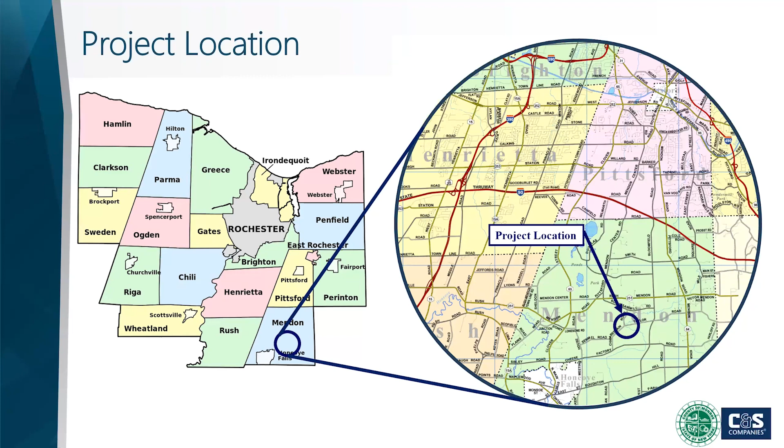The existing bridge was originally constructed in 1950. The main supporting members are steel beams that support a timber deck, and the abutments are also a timber design using timber piles and timber lagging. The bridge has a 27-foot long span and is 26 feet 6 inches wide. Traffic counts from 2019 show 439 vehicles per day cross the bridge.

Based on the existing conditions, this bridge was added to the capital improvement plan for the county for construction in 2025.

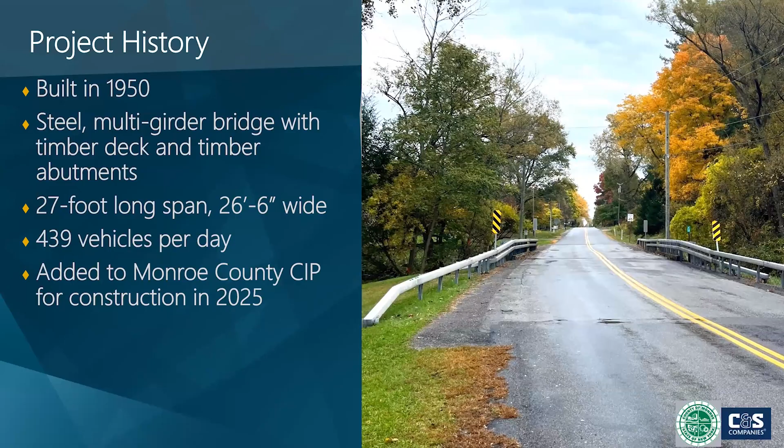Now I'd like to get into a summary of the existing conditions and the concerns at the structure. The first relates to hydraulics. Irondequoit Creek is a major water body in the area and is prone to flood events.

On the left side of the screen is the FEMA flood map of the area, and you can see that there is a wide floodplain both to the south and to the north of the bridge. This means that the bridge serves as a constriction in the floodplain. When this happens, the velocity of the creek is sped up, which results in erosion of the stream banks, like you see in the photo on the right side of the screen. This is on the southwest stream bank.

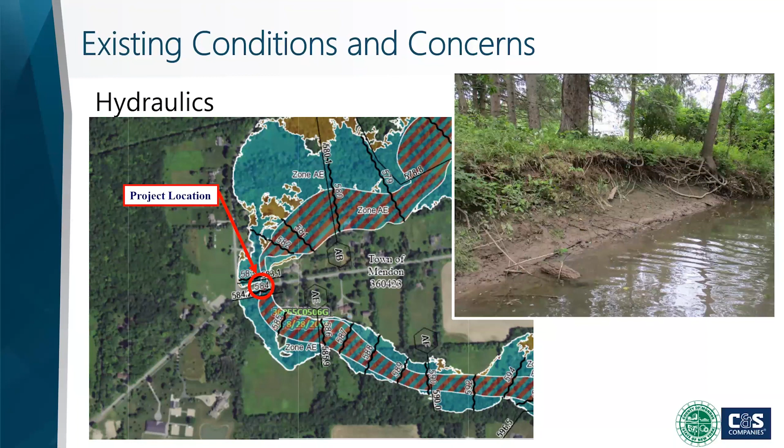Another aspect of the bridge that needs improvement is its width. As mentioned, the total clear width between the bridge railing is 26 feet 6 inches. This is narrower than the current standard lane and shoulder widths that Monroe County likes to have on all of their roads. This project will aim at making the bridge and adjacent approach roadway wider to meet these standards.

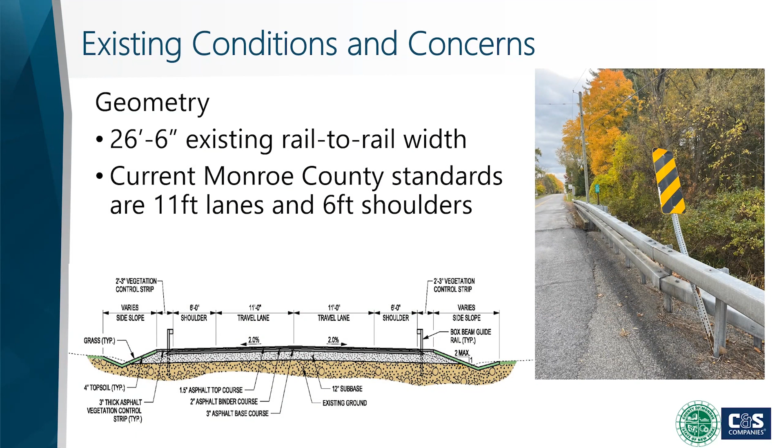There are a number of conditions on the bridge that need to be addressed under this project. These include deterioration of the timber deck, isolated areas of the steel beams that are showing some loss of strength. The timber abutments are showing their age, and portions of the wing walls have partially collapsed.

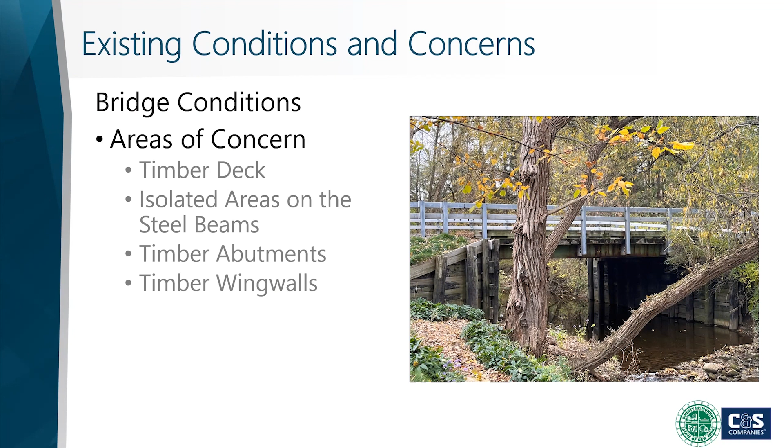The area of the timber deck near the fascia girders shows numerous areas of split and degraded wood, with small places where chunks of wood are missing. The wood is soft and rotting in spots as well.

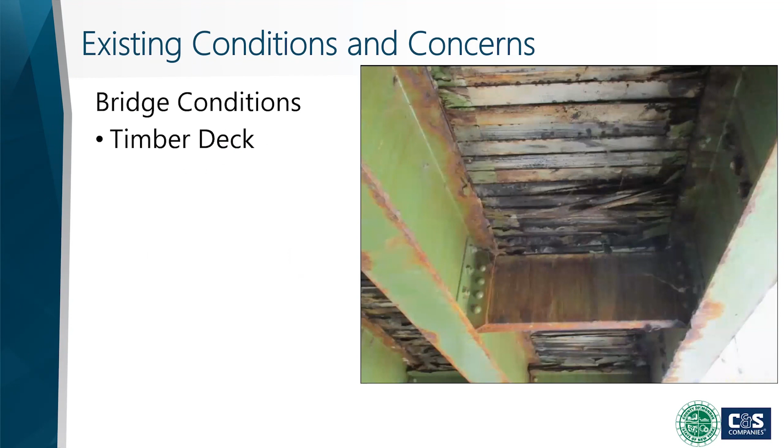This is a picture of the deck in 2020 when a hole had formed. Monroe County quickly fixed this issue, but it shows the need for a more permanent solution to the bridge deck.

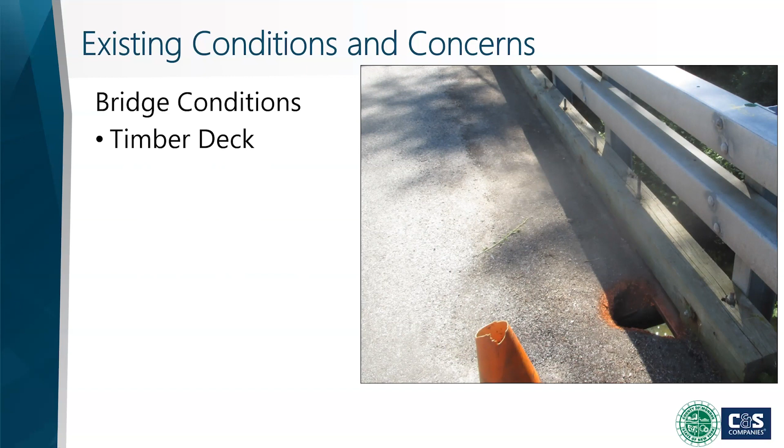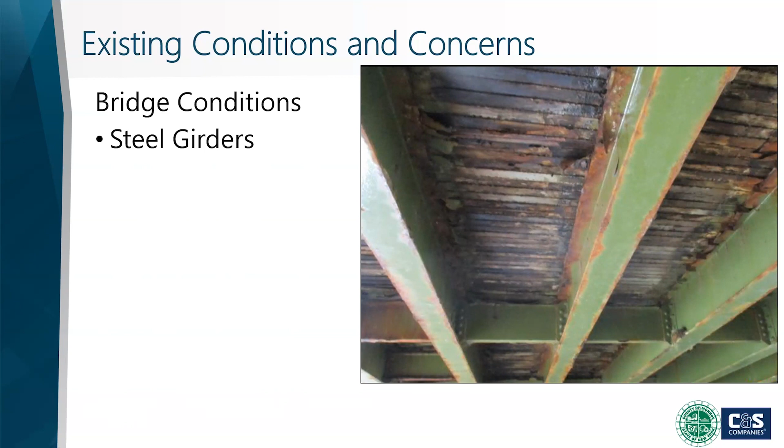For the steel beams, most of them are in good condition, but there are a few isolated areas where rusting has spread and is starting to make an impact. The worst location is on the northernmost beam, where rusting has caused some loss of section and a slight reduction in carrying capacity. It's nothing to be concerned about from a safety standpoint, but needs to be addressed.

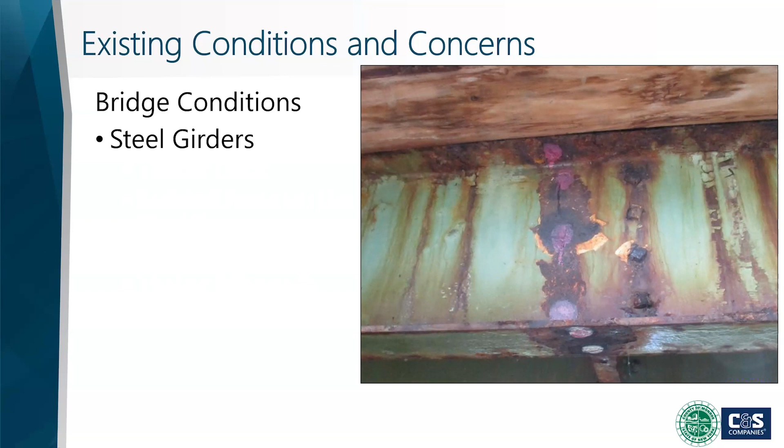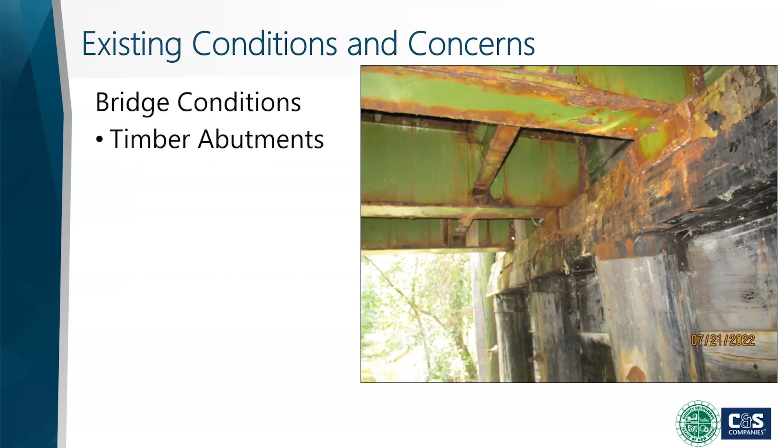The timber abutments are a combination of timber piles supporting a timber cap beam that ultimately supports the steel beams. There is timber lagging behind the piles that retains the roadway embankment. The piles and cap beam are slightly out of alignment, and there are small gaps in the lagging caused by movement of the various timber members. The cap beam itself is also deteriorated from exposure to the elements over the last 73 years.

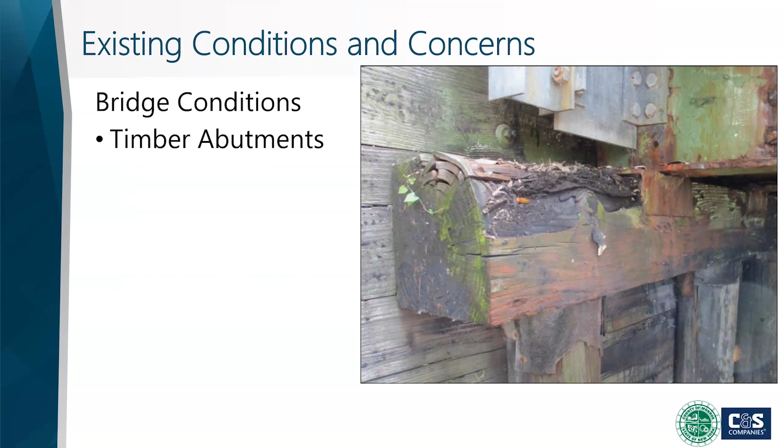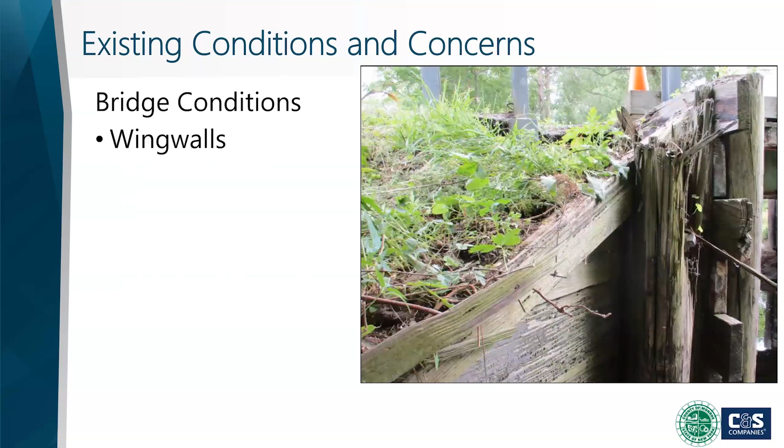The wing walls are in poor condition with some loss of embankment from behind the walls, and there are some missing boards. There are a number of rotting, splintering, and displaced timber elements throughout each of the wing walls.

Given the condition of the bridge, the hydraulic issues, and the geometry limitation, Monroe County has advanced this project with the intention of replacing the existing bridge in its entirety.

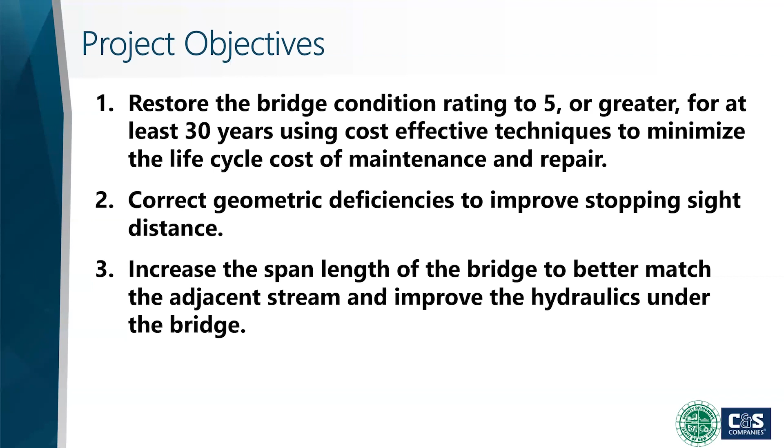Specific objectives for this project are as shown on this slide: restore the bridge condition rating to 5 or greater for at least 30 years using cost-effective techniques to minimize the life cycle cost of maintenance and repair, correct geometric deficiencies to improve stopping sight distance, and increase the span length of the bridge to better match the adjacent stream and improve the hydraulics under the bridge.

To achieve these objectives, a preferred alternative has been developed. The preferred alternative will completely remove the existing bridge and replace it with a new bridge. The new bridge will be a 3-sided precast concrete rigid frame and will look very similar to the bridge shown on the right.

The bridge will be 37 feet long, which is a significant increase from the existing 27-foot long bridge, and the opening will be 10 feet high. This will increase the hydraulic capacity and improve hydraulic conditions through the area.

150 feet of road reconstruction will be needed to allow for the bridge construction, and this section will be widened to allow for 11-foot lanes and 6-foot shoulders, which matches the Monroe County standard widths. Stone fill bank protection will be added to protect the new structure from erosion and scour.

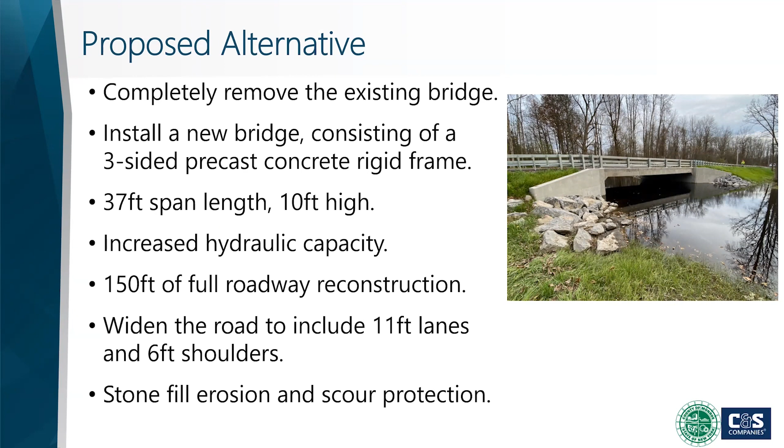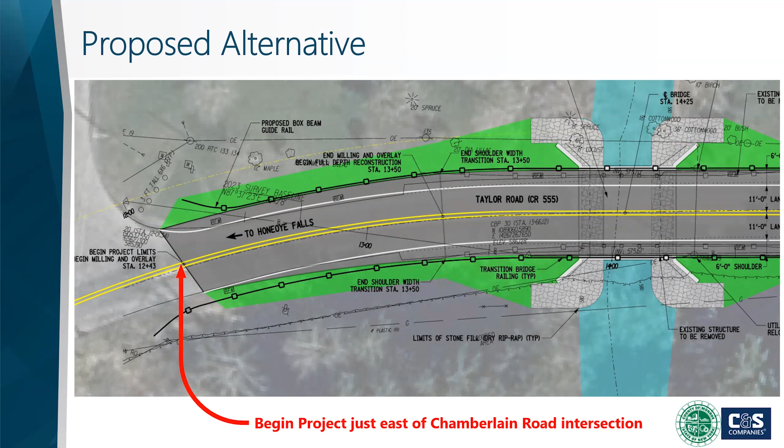Here is a graphical representation of what the entire project will entail. Some of the specific aspects of construction are as follows. The project will begin just east of the Chamberlain Road intersection. It is at this point where our project will tie in with the existing pavement.

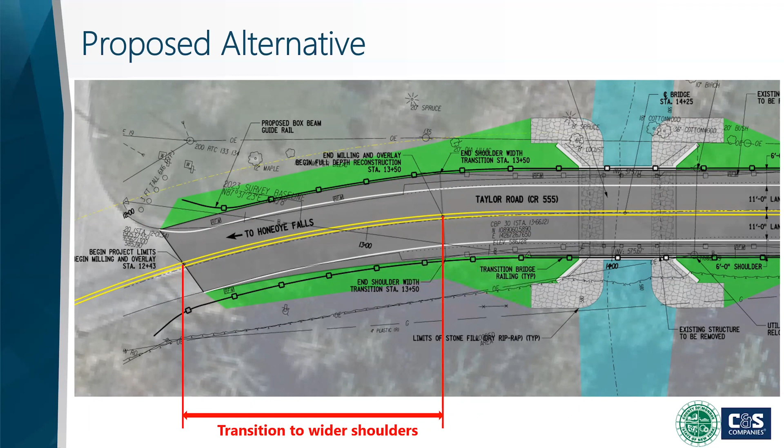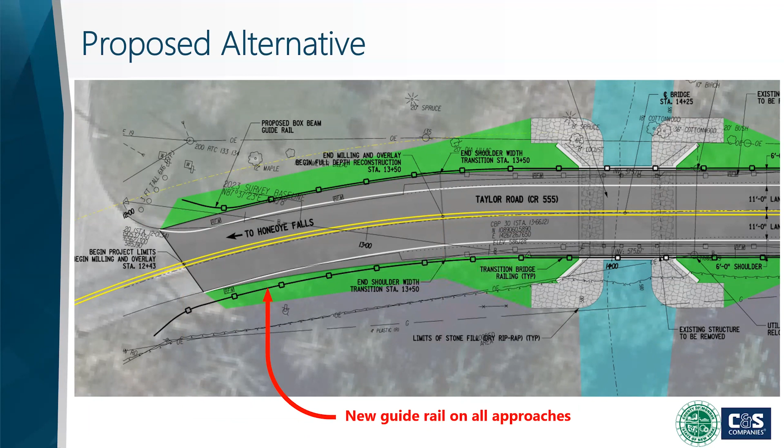The first 100 feet or so will be a transition from the existing pavement width to the widened portion that will be extending over the bridge. This requires a pavement resurfacing within the roadway and reconstruction of the shoulders. This area will also have guide rail added to it, which will be the case in all 4 corners of the bridge. The railing will be upgraded to meet current safety standards.

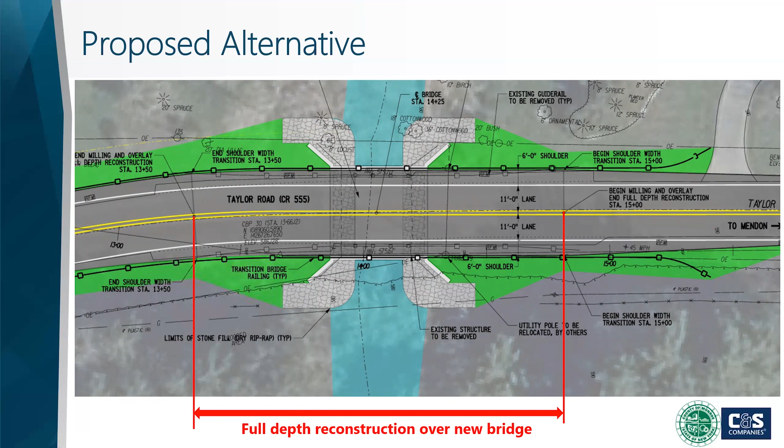As we move to the area surrounding the bridge, this is the fully widened section. The roadway pavement will be completely replaced, and this section will be excavated out so that the old bridge can be removed and the new bridge installed. As mentioned, this section will be widened to meet current Monroe County standards and includes 11-foot lanes and 6-foot shoulders.

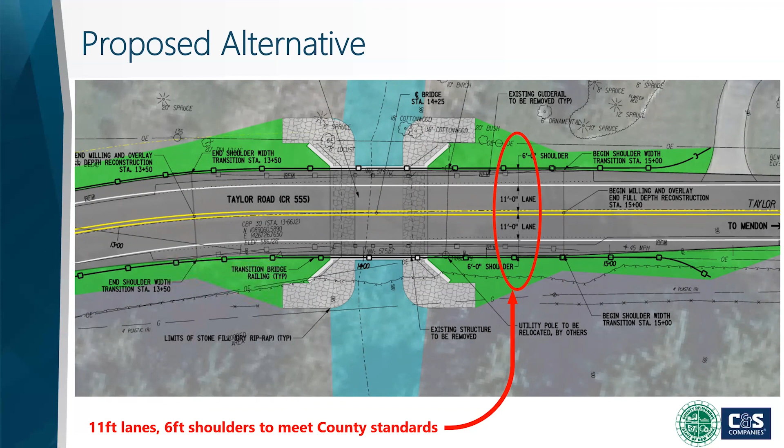Here is the bridge itself. It will be 37 feet long and 10 feet high. The new bridge will consist of a precast concrete rigid frame that will be supported by piles driven deep into the ground. It will be 37 feet 4 inches wide to accommodate the wider lanes and will have a 75-year expected service life.

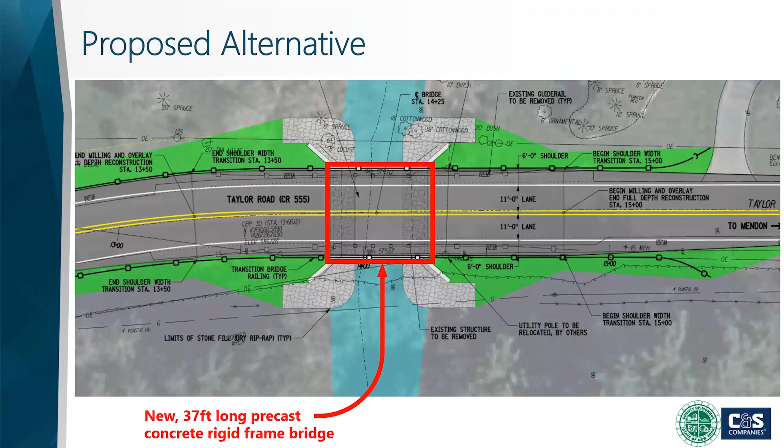This type of bridge is very maintenance friendly and will significantly reduce future maintenance costs for the county. Stone riprap bank protection will be added around the structure and wing walls to protect them from erosion and scour.

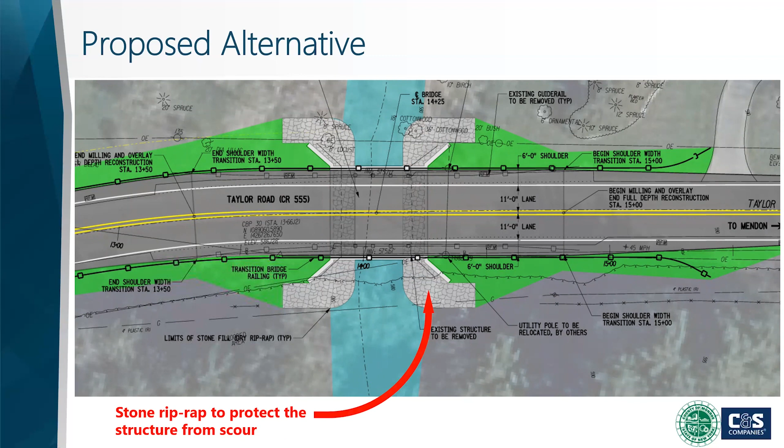There will also be some utility coordination needed on the project. There are 2 poles right next to the existing east end of the bridge. These will be in the way of construction and will need to be relocated. There may be an opportunity to clean up the design of the wires as there are multiple poles in the area.

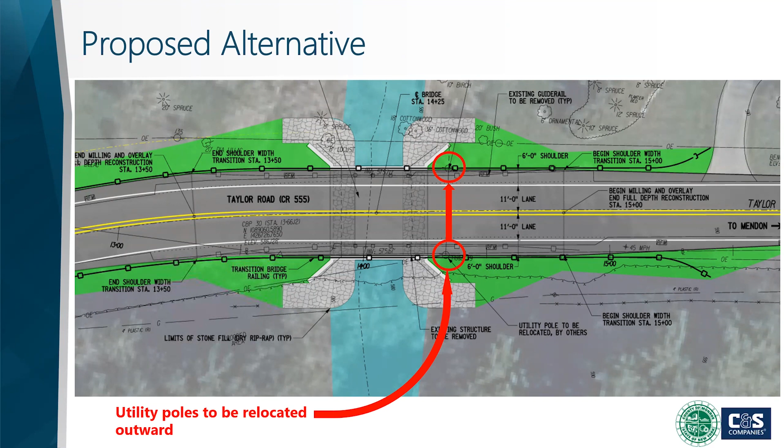To perform the bridge replacement, some of the work will extend outside of the current highway boundary, so the county will need to acquire some easements in the direct vicinity of the bridge. Affected property owners will be contacted during final design to work through the property acquisition process.

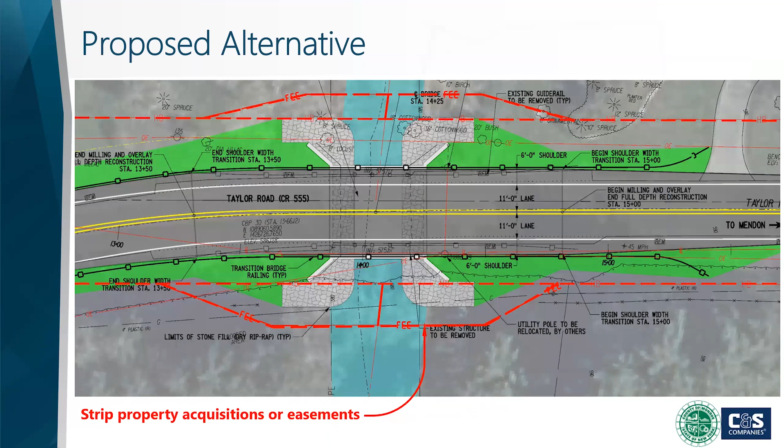Given the extent of construction and narrow width of the existing bridge, the project will need to be constructed using a full road closure. A detour with advanced signage will be posted. The planned detour uses Chamberlain Road, Bulls Sawmill Road, and West Bloomfield Road. The detour length is approximately 2.7 miles, adding about 5 minutes of drive time for travelers.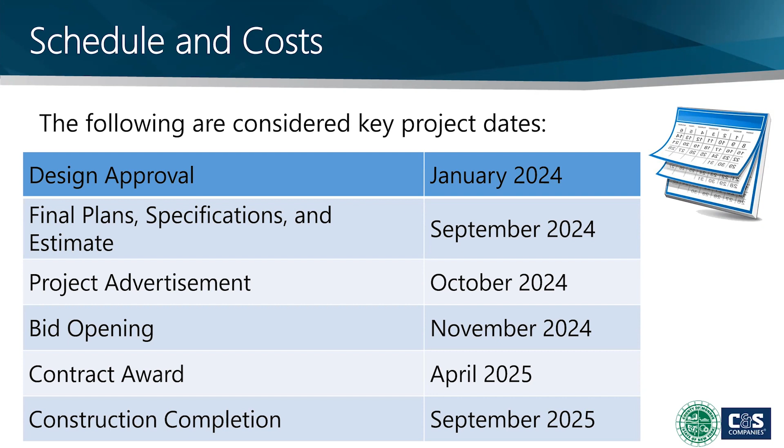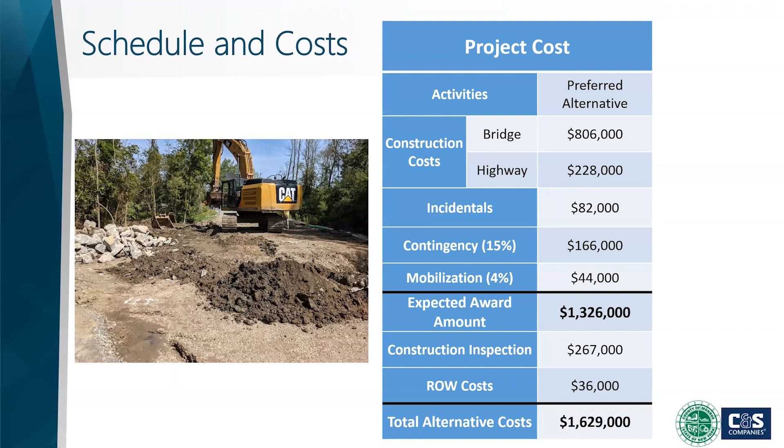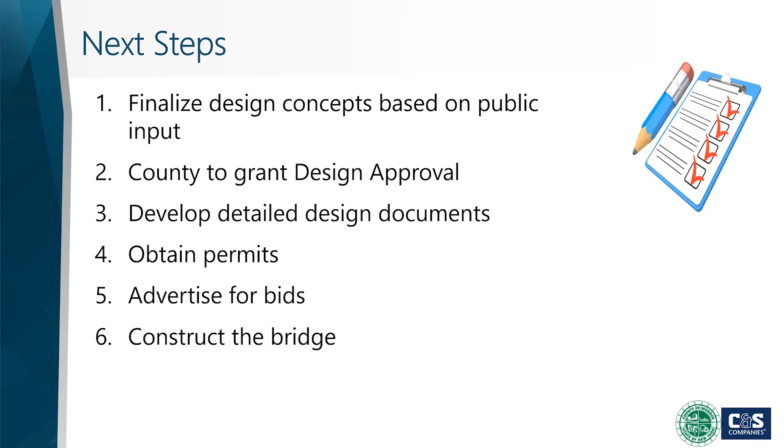These are the next steps that we will be completing over the course of this year. The current concept will be finalized once comments from the public have been received. The county will grant design approval, and C&S will develop detailed design documents and work on getting all of the permit approvals. The project will be advertised and bid in the fall, and construction will occur next year, as previously mentioned.

We would like to hear from you about what you think is important about this project, so please reach out to us with any comments, questions, or concerns.